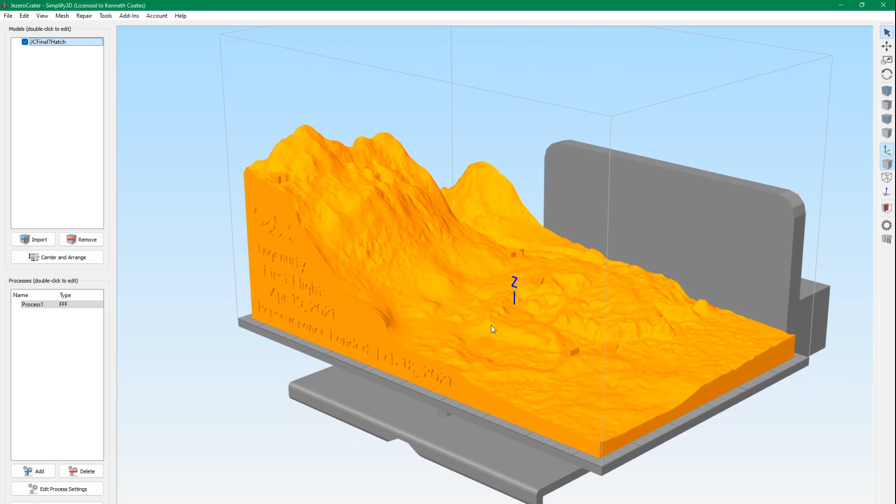This is where they landed. So I have these different terrains. This is the terrain of the crater where it landed. I've got different markers on here. This is where it landed. This is where it did some science, and it's going to go driving up this canyon and maybe up to the top of the rim of the crater.

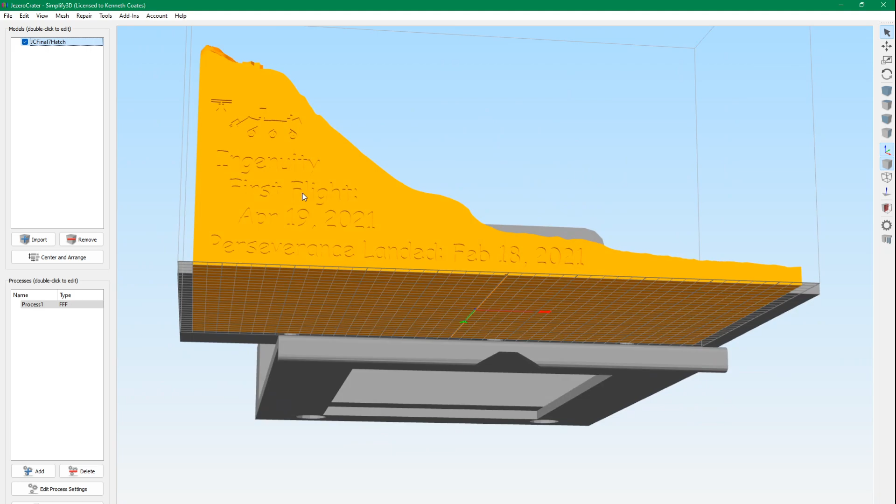Along the edges, I have the key on the back and some information about when they landed and when the first flight took place. On this side, I've got

the two organizations responsible for the rover, JPL and NASA, and the name of the crater, Jezero crater, and then a 1 kilometer scale. So this is a nice outreach item that I use for public outreach from my astronomy club.

Anyway, I tried slicing this on the Simplify3D version 4. You'll see that it has some problems.

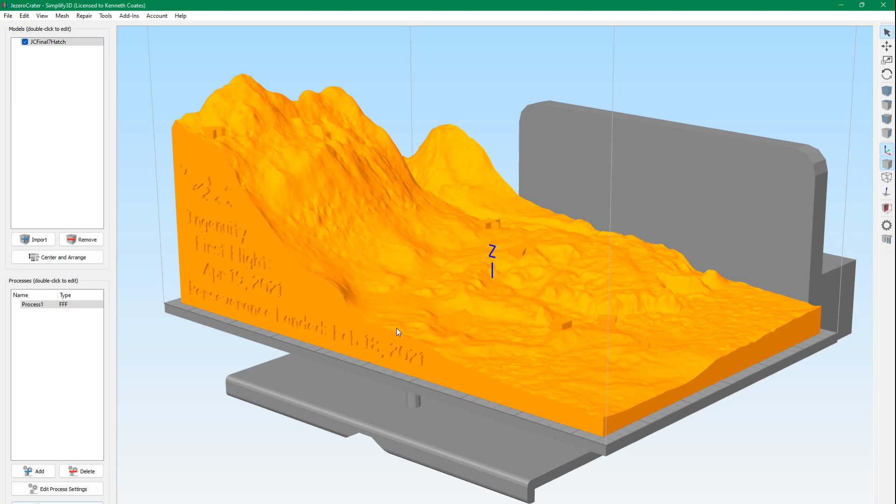Again, this model is very complicated. I started out with a 3D model published by NASA, and then I added these markers. So if you look how it sliced this, for these markers, like the square marker, it didn't put any support in that whole area there.

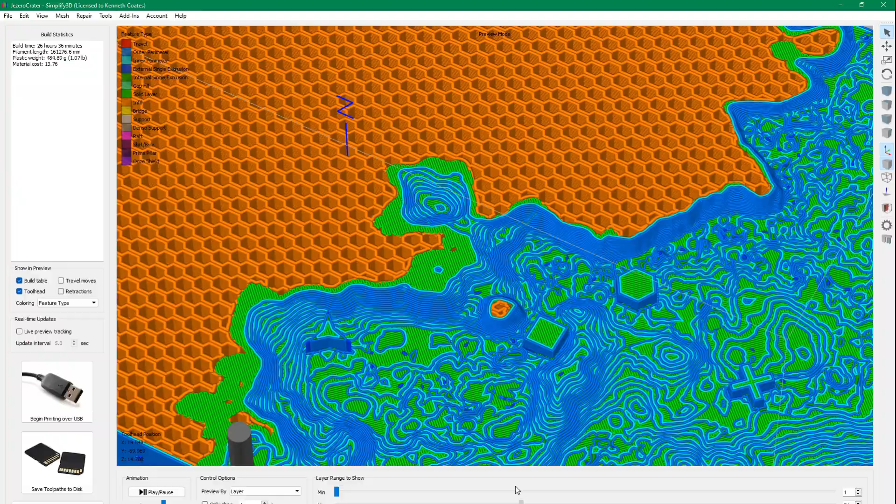It turned out that I didn't actually print this because it looked like it was going to be a problem. So I didn't print this one.

Instead, I used FlashForge, FlashPrint rather. This is the free software that comes with a FlashForge printer. And for this one, let's look at the parameters I use.

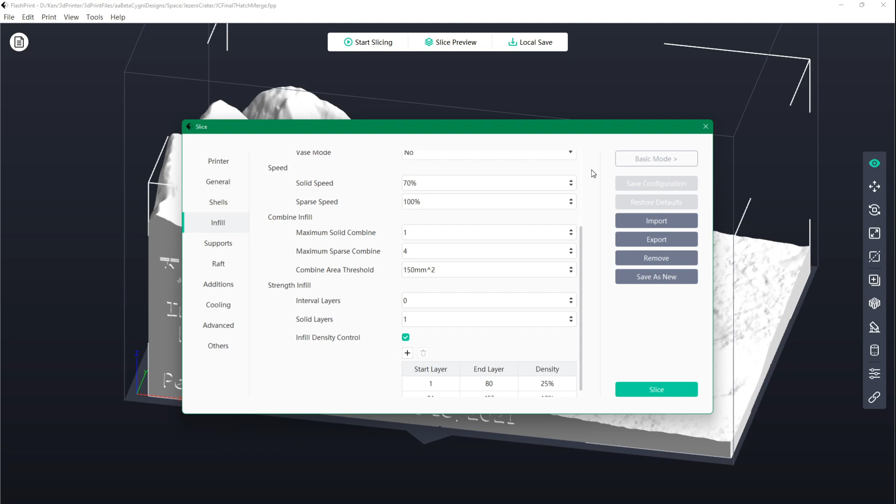So the lower area I was worried about being stiff, so I increased, and also I was worried about the flat areas not having enough support.

So for the first 80 layers I had 25% infill density, and after that I went down to 10%.

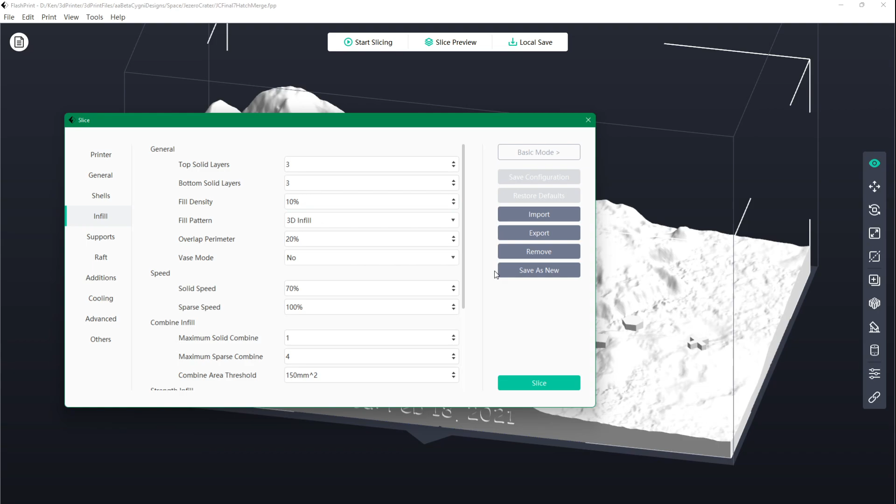And I'm using a 3D infill, which is a gyroid. So if we do the slice preview, you can see. So there's the gyroid.

So it's 25% down here, and you can see it's laying down the flat areas. And then as it gets higher up here, it's only 10% because it's steeper, so it doesn't need as much support as what I figured.

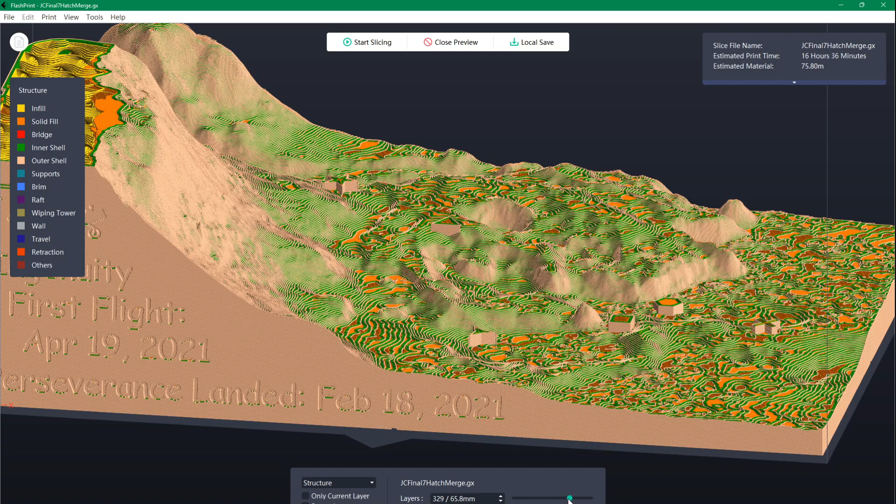So this prints in a little over 16 hours, and it prints okay.

But I thought this would be a good opportunity to see if one of the new features of Simplify3D version 5 would help with slicing this model.

So I dropped it in here. This is on the G2 now, my Guider 2, so it's got a bigger print area. And for this one,

I picked gyroid because that seemed to work well for the other one. But the feature I'm talking about here is the dense internal infill.

So when you get close to putting the surface layers on, you can increase the infill density to give it some more support, so it'll be stiffer.

So this defaults to 0. So if you have this as 0, then it won't do this.

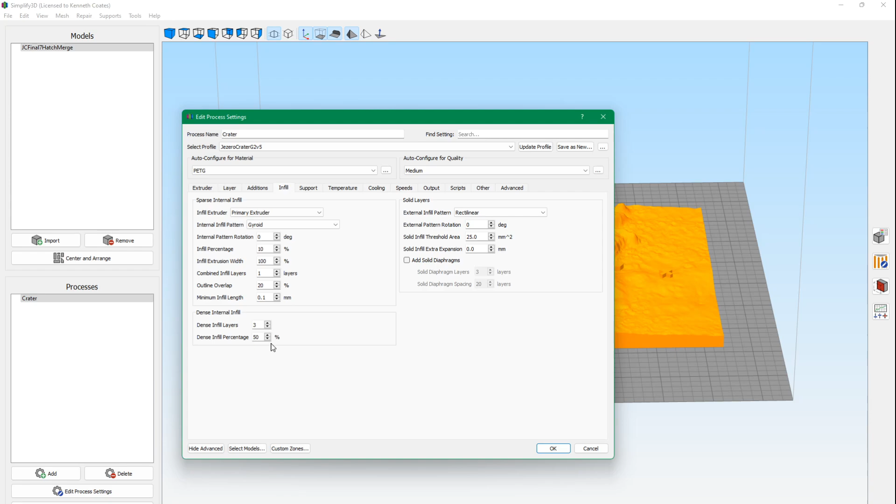So again, I'm trying to print the whole thing at 10% infill, but with this, I'm hoping that these flat areas will have enough support so that they'll print properly. So we'll see. It'll be a little bit of a challenge to print this, I think, using these parameters.

But if it does, then it's going to take a lot less time and use less material. Because the FlashForge, well, this version of FlashForge only gives you the

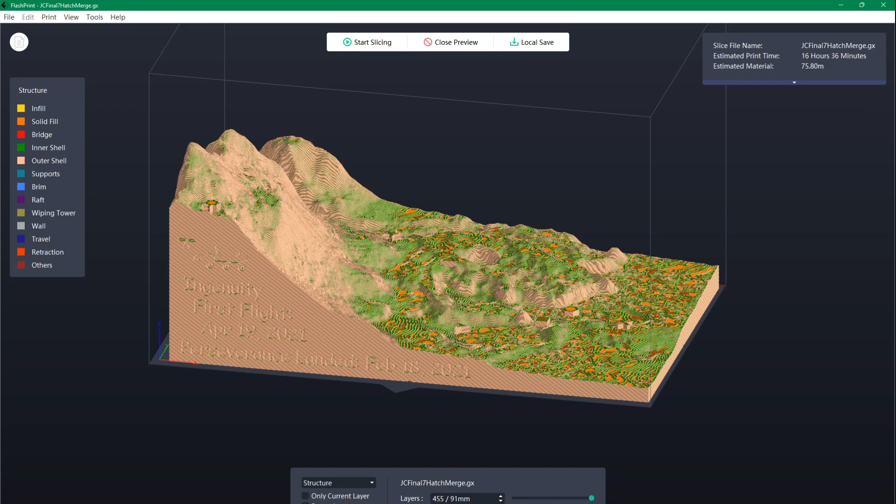length of material. I think the newer version, which I actually had some problems with, so I'm still using a 5.2, will tell you how many grams you're using. But according to my calculations, it was using about 220 grams of filament.

So for this one, with 10% all the way through, it's only going to use about 187 grams. So for one reel, a 1 kilogram reel, I can get 5 of these prints with this print, and with the

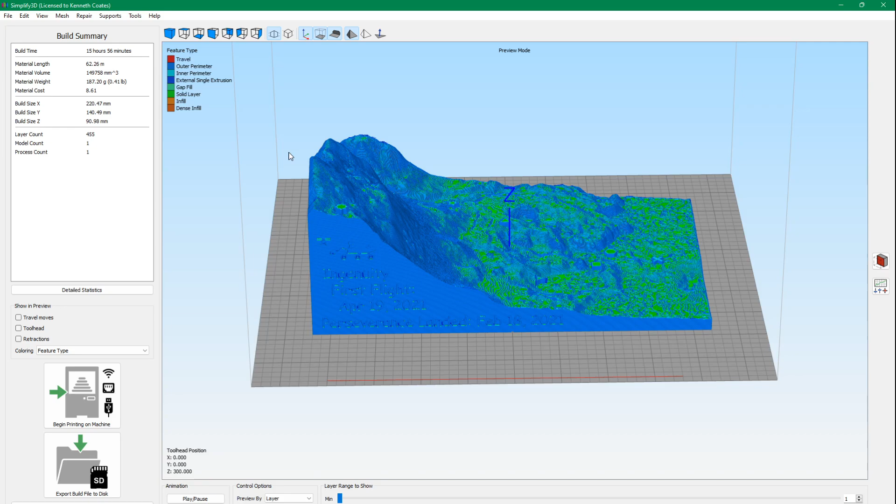FlashForge version, I only get 4 prints. So let's look at how this sliced it.

So we can look for those problems before. So here's that square before, but you can see it's putting support material in that square area. So it sliced that properly now.

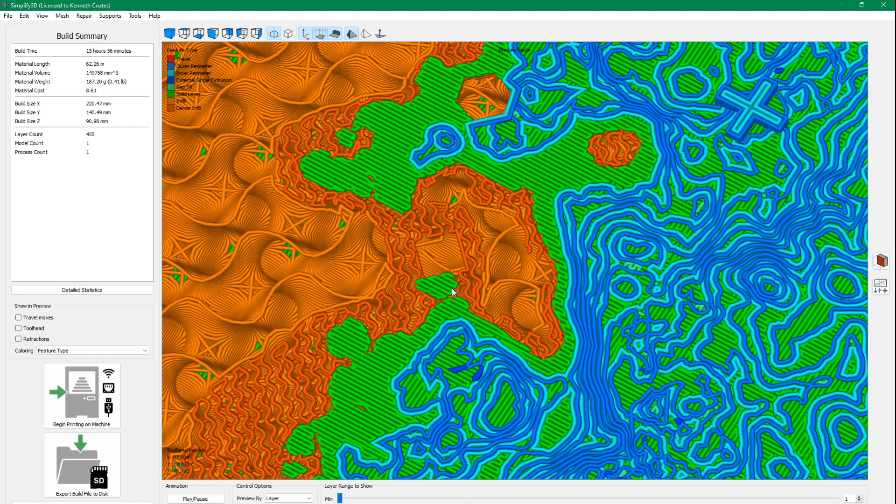And these red squigglies here, these are the higher density filament or infill that's putting in when it gets close to putting in the three surface layers.

So the question is, if we look at some of these, it goes over here. You can see here, it's just printing off, not supported. So it's doing the high density, but it's printing it not supported. So whether that, it's like bridging, right?

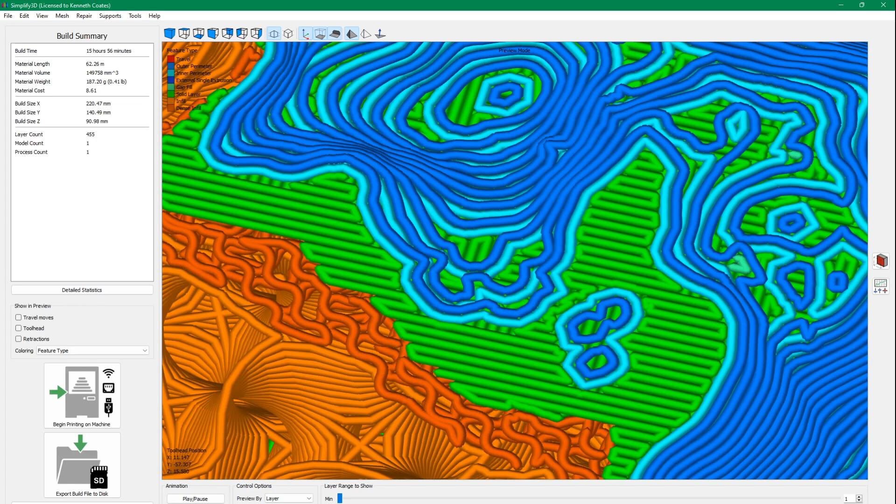So I'm hoping it's squiggly enough that it'll adhere to each other and will make a surface that will make a nice clean surface and support this.

I'll have to see. This could fail. I have to give it a try.

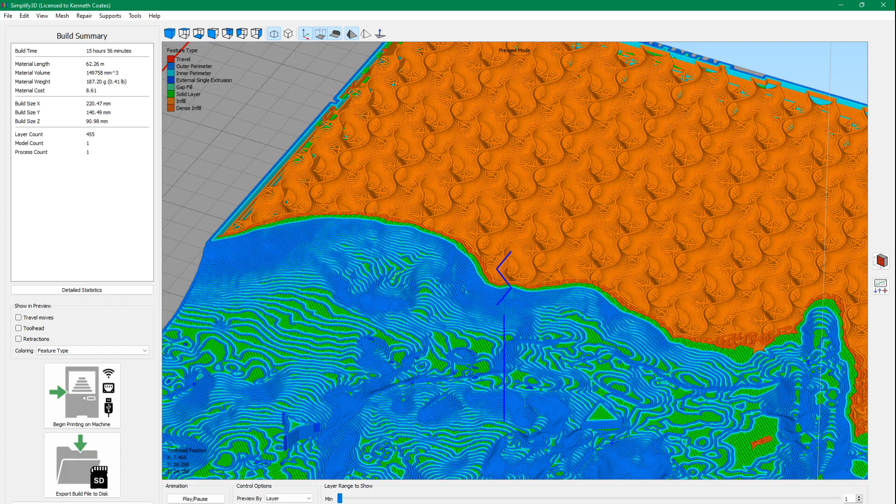And again, when we get to the higher elevations, there's no problem because it's only just doing a little edge here. So because the model gets much steeper up here, you don't really need that much support because the layers are printing on top of each other.

Anyway, so this is only taking 15 hours. So actually about the same amount of time, but less filament.

I think I'm going to go for the whole deal here. I'm going to try doing combined infill to speed it up. Because it's doing combined infill, it's only printing every second layer of infill, so I'm going to change this to 4.

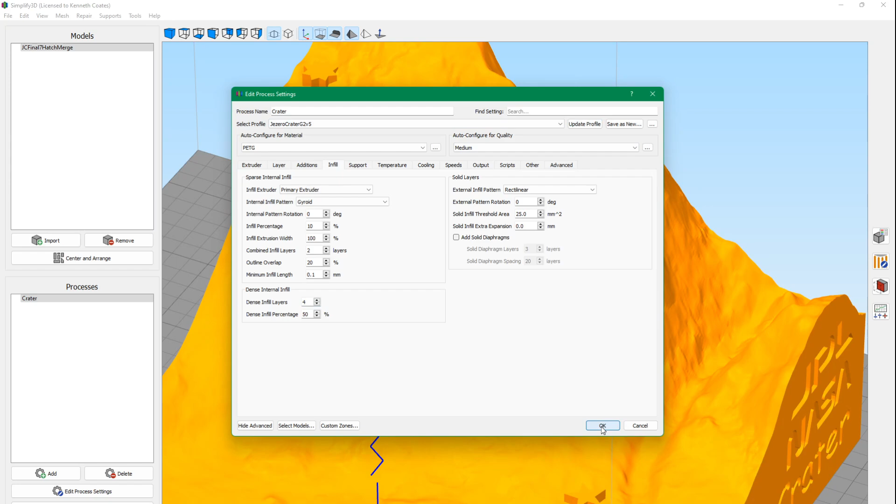Let's try that. That'll make a dramatic difference in the amount of time it takes to print. It's a little under 13 hours now, so that saves about 3 hours.

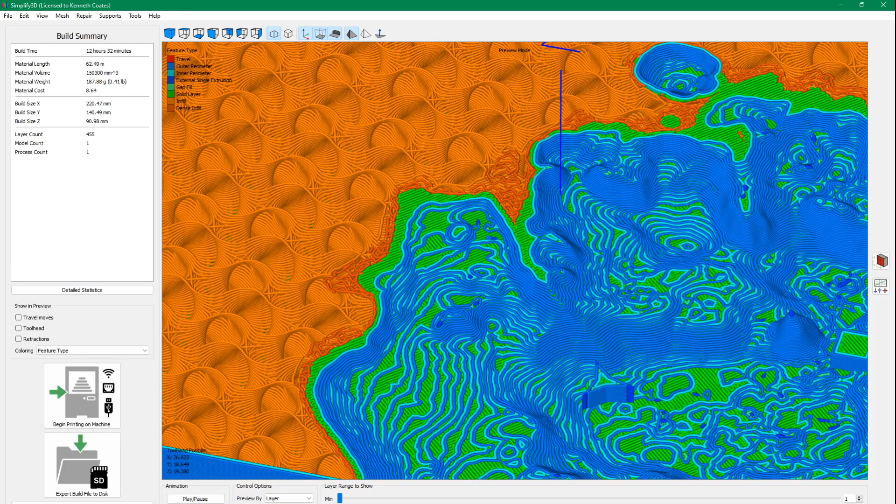So I'm going to try this. It could fail. If it does, I'm out a couple hundred grams of filament. But if it works, that'll really be a big help, getting an extra print out of each reel and speeding things up considerably.

A 16-hour print is kind of, the longer the print, the more risky it is, because you could get a power failure or something else could go wrong. All right, so we'll try this out and we'll see how we do.

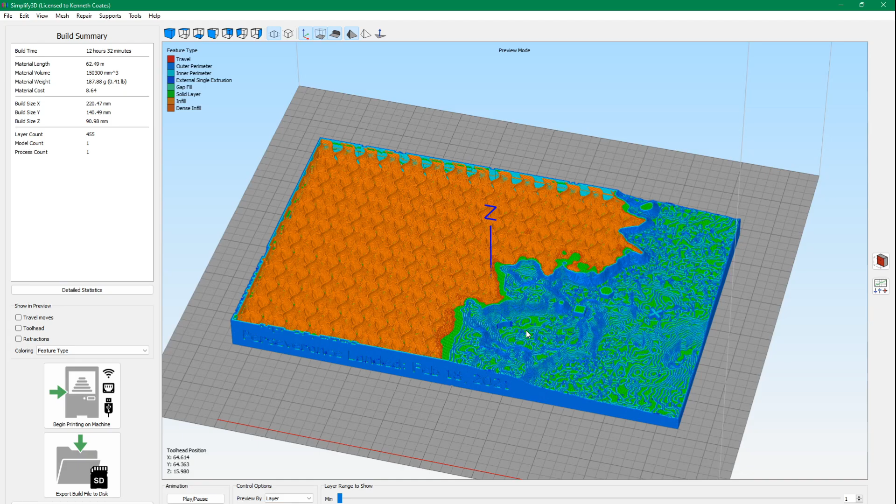Okay, so we're ready to test our print of the Jezero Crater 3D model. And this is our first real test. We loaded our filament, we're ready to start printing.

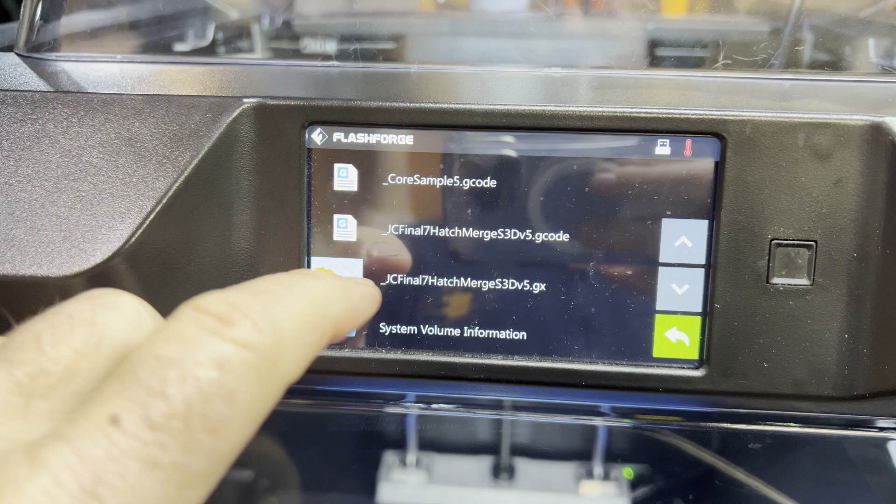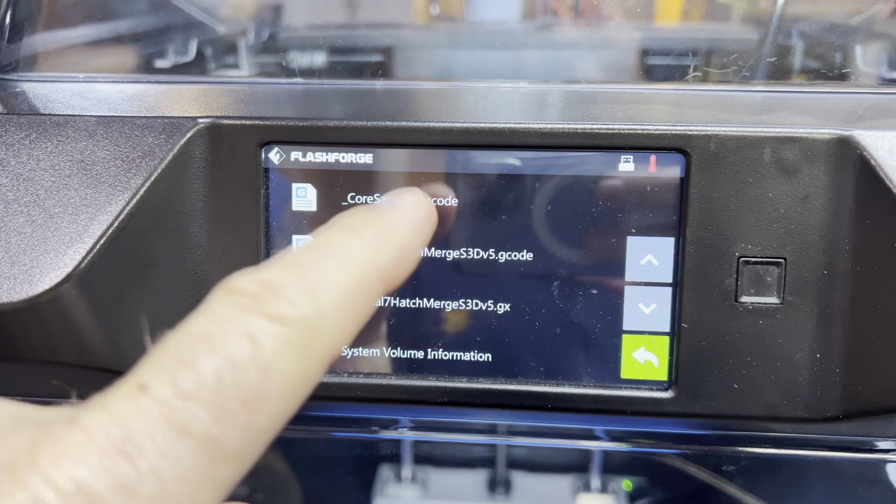So Simplify3D produces 2 files for the slicing: a regular G-code file, which is what we've been getting from version 4, and also a GX file, which is specific to the FlashForge and includes a thumbnail.

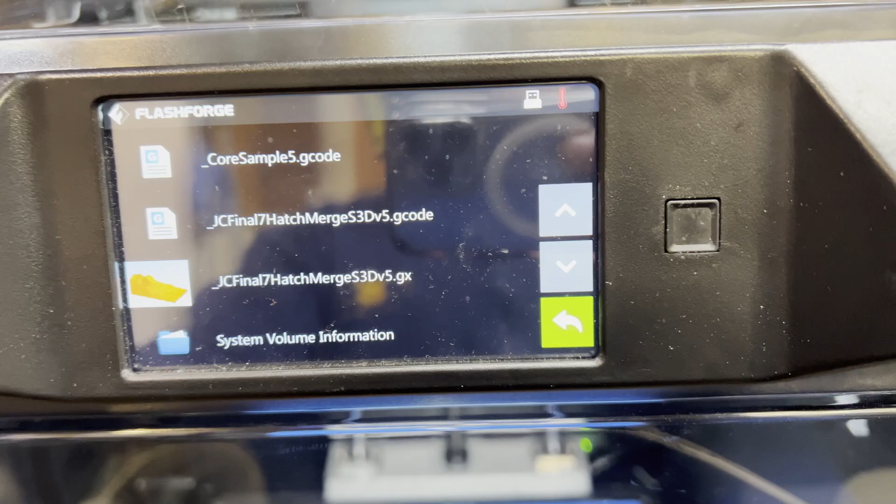So there's our model. It's cold here in the garage this morning, it's 54 degrees, and pretty high humidity because it's been raining. So I'm printing with the top on, even though they say don't print with the top on with PLA. I always do unless it's over 70. So anyway, we're going to start this.

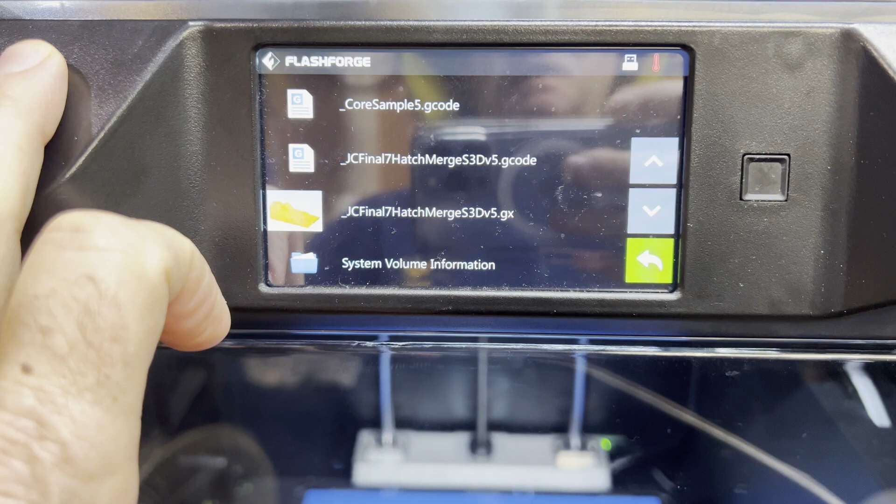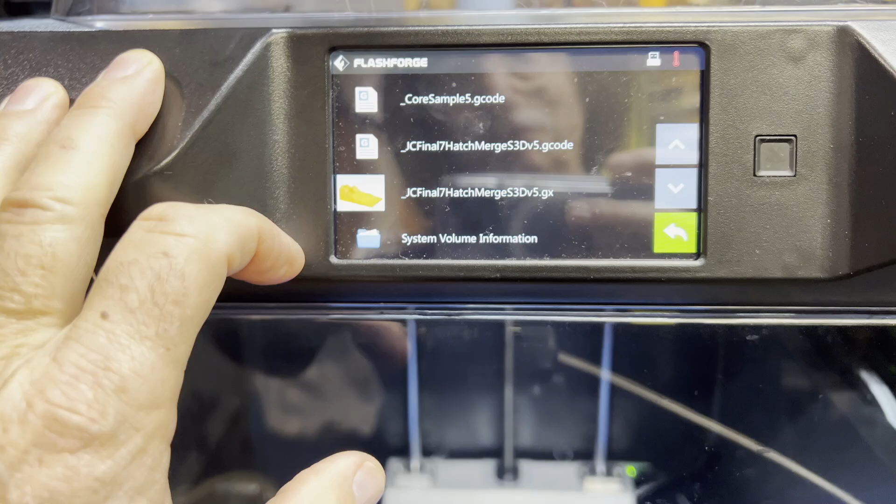Simplify3D predicted 12 hours and 32 minutes. Now, if it was FlashPrint, I would believe that number, and it would be very close to that. But FlashForge version 4, or Simplify3D version 4, was usually about 10% under the actual time.

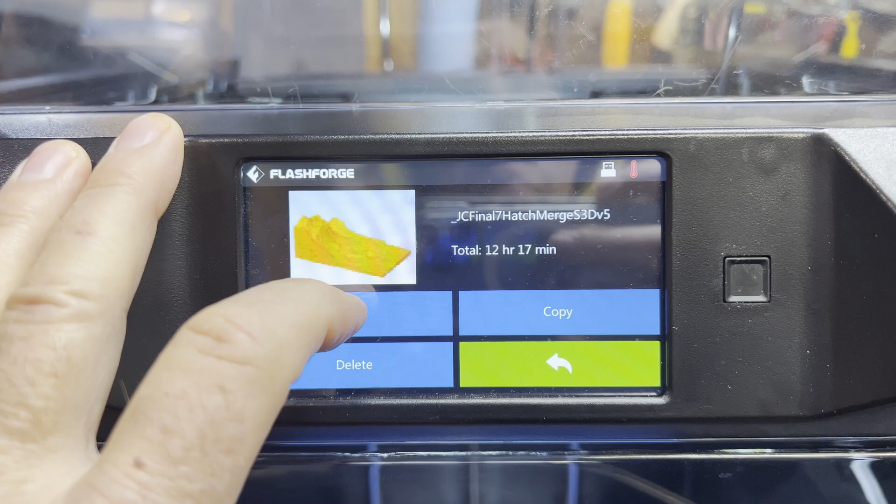But we're going to go ahead and try. We're going to use the S3D version, and it says 12 hours and 17 minutes. So we're going to set our timer for 12:17 and then come back and check on it.

Now I do have the time-lapse camera set up, so usually I do 10-second intervals, but since this is a 12-hour print, I'm going to do 30-second intervals. Then I can compress it down later and make it into a quick time lapse.

All right, so starting up. I usually don't start the time lapse until it gets up close to the top, so I'm going to start that up. We'll start the timer, and then we'll come back periodically during the print and see how it's doing.

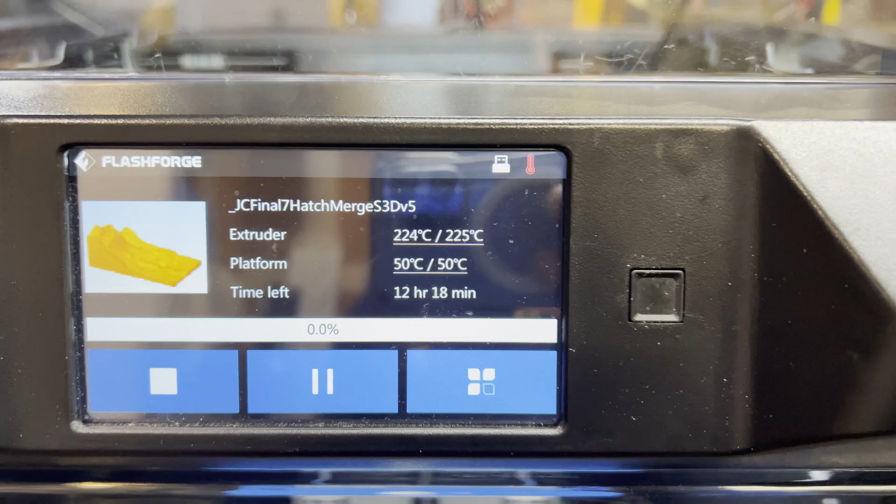Mostly interested in seeing what happens - now it says 12 hours and 18 minutes, so it's already changing its prediction. Most we're interested in seeing how the 10% infill and the dense infill on top of that works on the flat areas of the model.

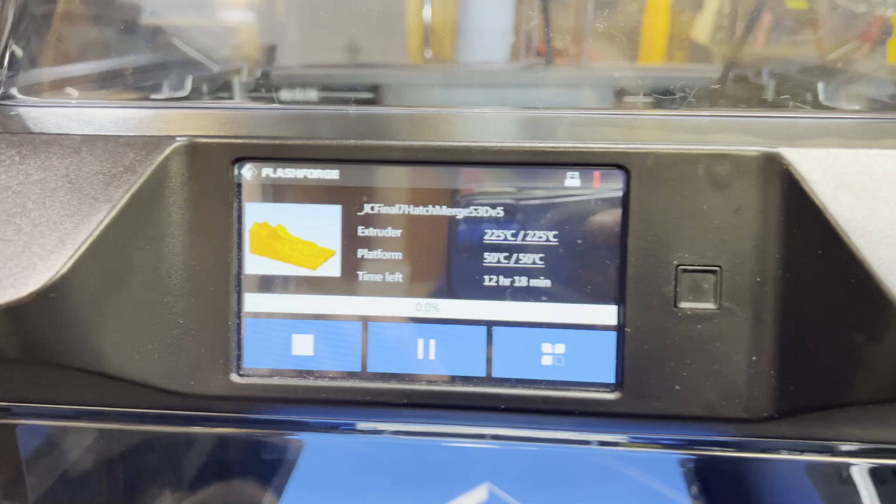See, this area down here, it's pretty flat. The steep areas, I'm not worried about the infill, it's fine. And if you remember from before, with the FlashPrint slicing, all right, starting up here.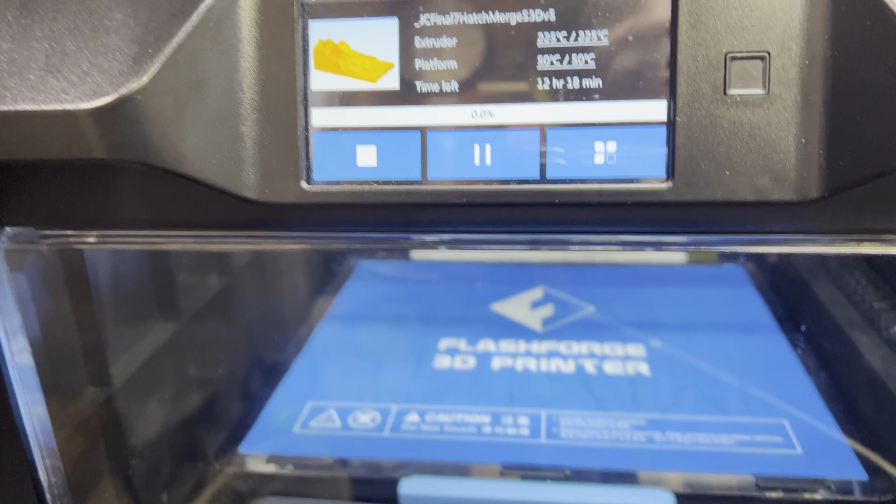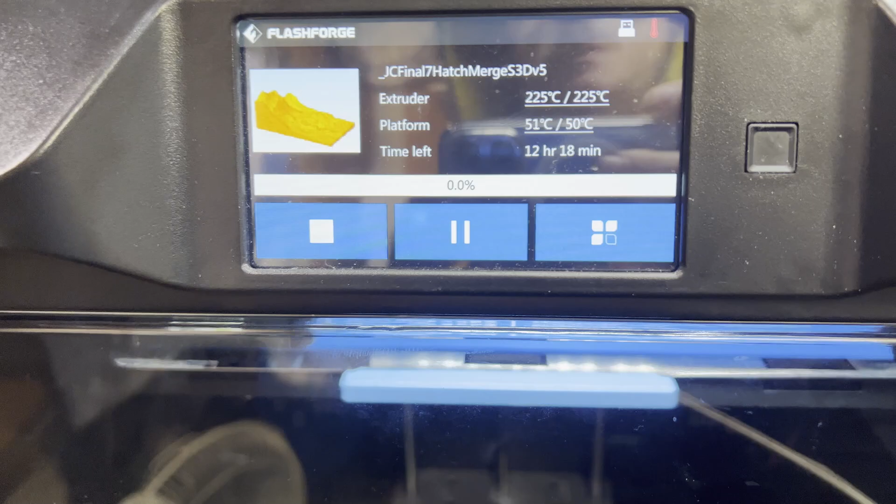With the FlashPrint slicing, I used 20% infill down below and then changed to 10% up above. So that took 16 hours to print and used more material. So I have high hopes for this one.

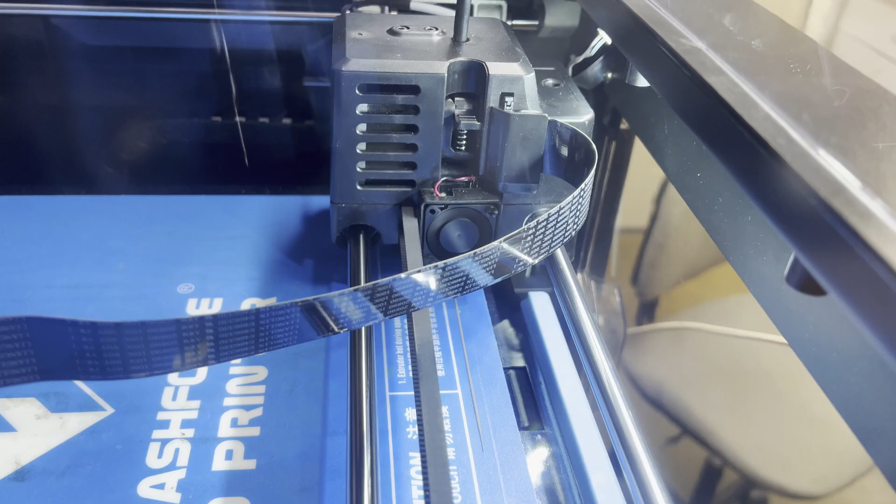Let's see if we got started okay. Yeah, our first move is okay, so it looks like we're off to the races. All right, we'll come back in a couple hours and maybe it'll be up to this flat area where it's doing the dense infill. That'll be interesting to see.

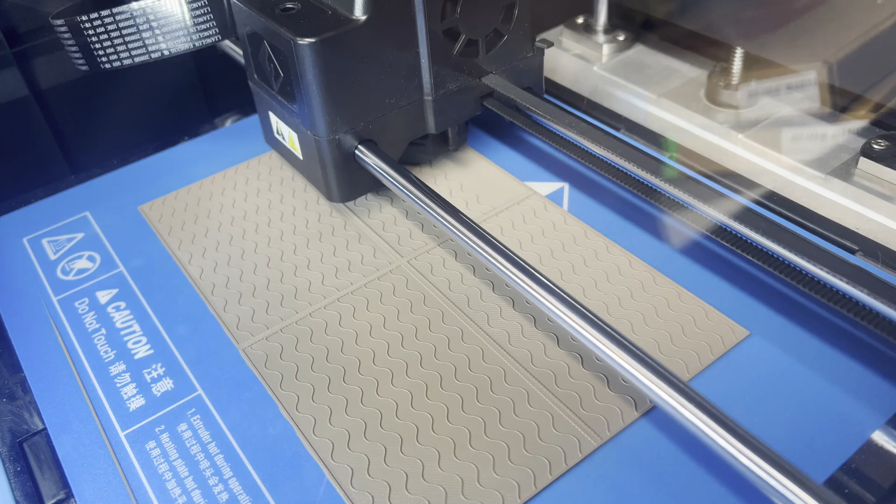All right, this printer got off to a good start, and you can see it's laying down the first layer of gyroid infill. This is 10% gyroid.

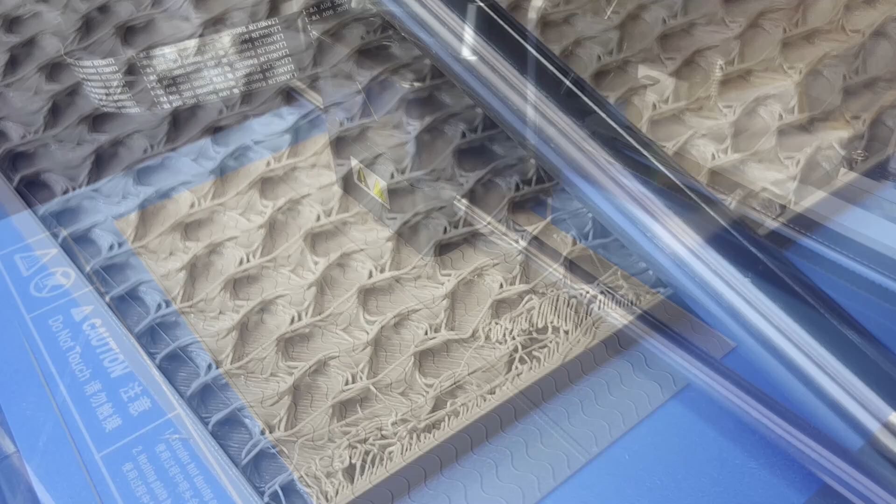All right, you can see it started to put in the denser infill. I just went over it, so I think it's working, even though some of it's printed out in the air, because we're printing 2 layers of infill at once, so it's going to be a thicker bead of filament.

And it's going to be cooled, and I think I'm doing 2 thick layers, and I think it's going to work. So we're going to see, once it starts laying down the surface on top of it, we'll see if it actually is working.

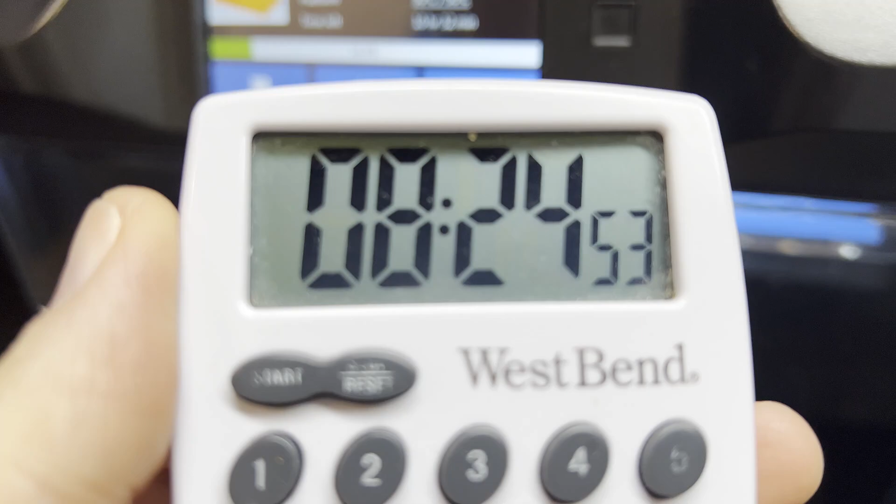All right, I set my timer at 12:18 to start with, and now we're at 8:24, so almost 4 hours of printing. But this guy is still saying 10:31, so it looks like it's recalculating as it goes.

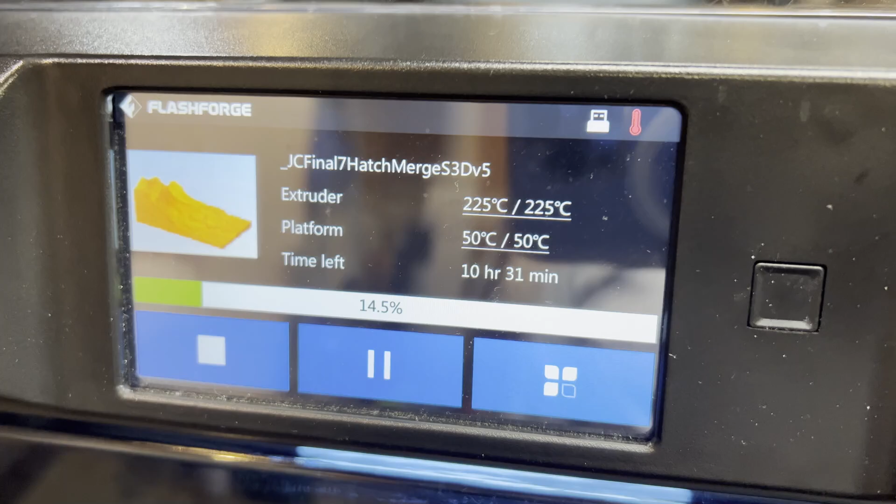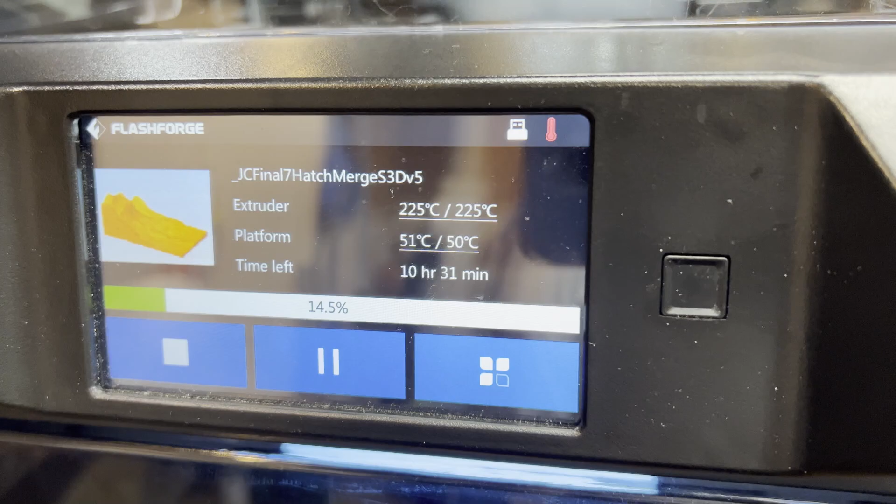I did do one FlashPrint print earlier, and it was pretty accurate, but then at the end it kept adding minutes because it wasn't quite going to finish in time. Anyway, it's not going to take 12 hours, but we have enough time, so it doesn't matter.

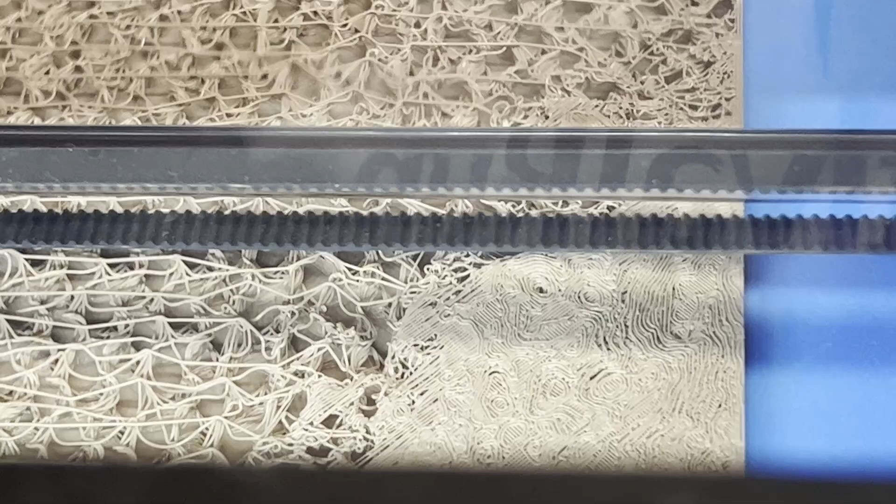Let's take a look at how it's doing, and you can see that it's doing pretty well. All right, here's that same area with the FlashPrint version, and you can see it has little holes and voids just like this one.

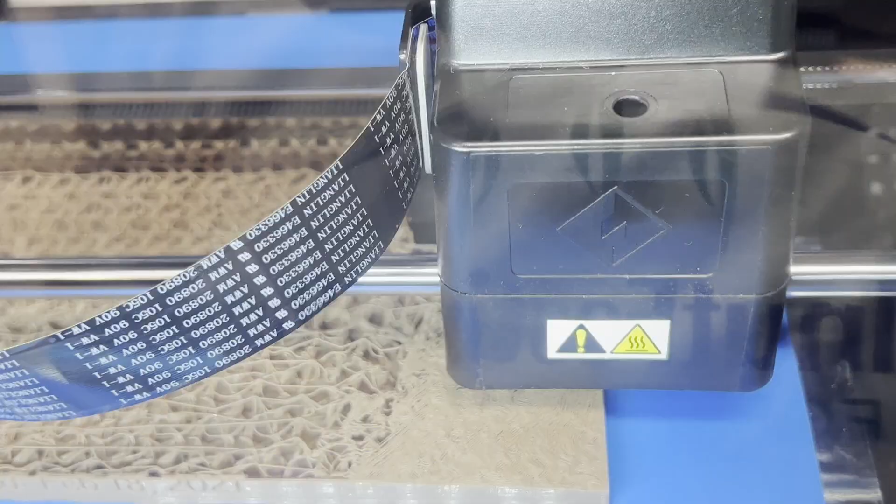So I think the quality is actually similar. If it is, that's a big win because it's going to take a lot less material. We can get 5 prints per reel instead of 4, and it should be faster.

This one took 16 hours. I'm expecting this one to not take that long. So we'll know eventually when it's all done.

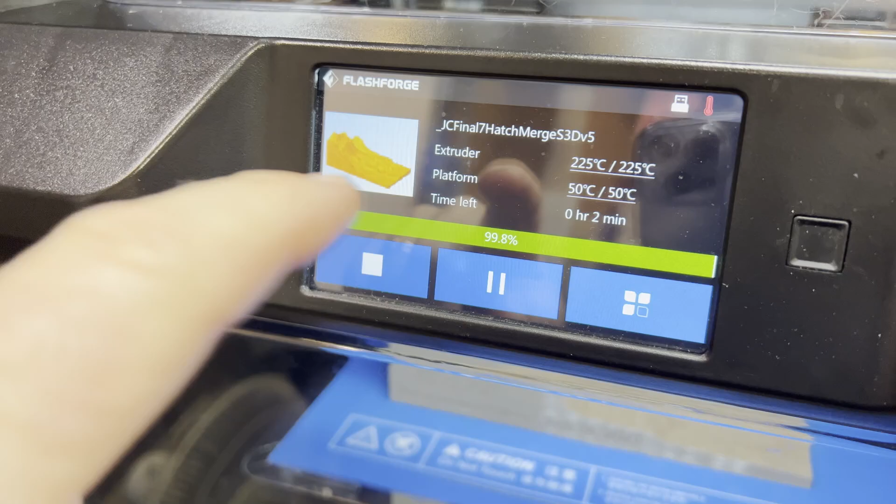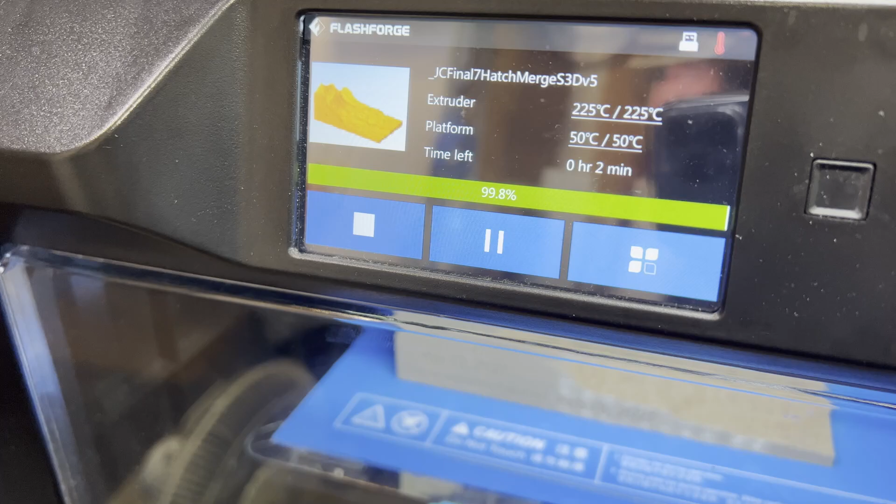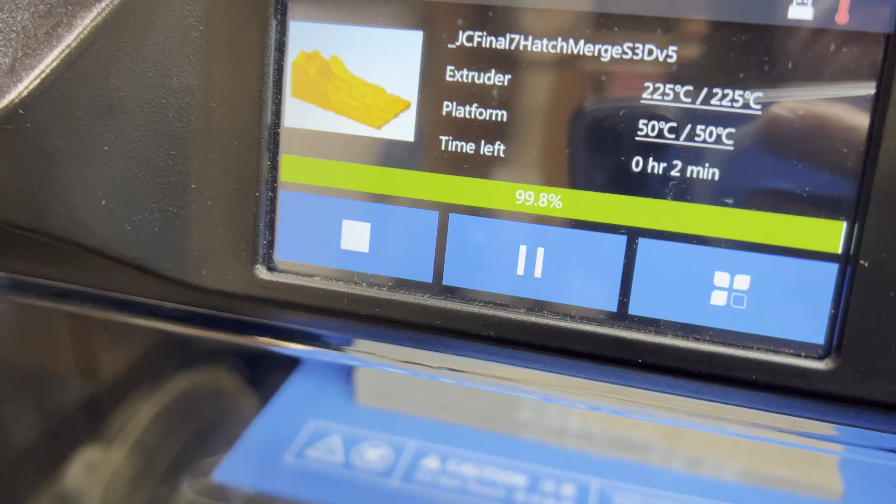All right, so it's at 99.8%, and it seems like with the GX files, it continually refines the time remaining, which is actually pretty handy the first time you're printing something. Even though it wasn't accurate in its overall prediction, because we're upwards of 13 plus hours, I don't remember exactly when it started, but when it's all done, it'll tell us the total time. As it's printing, it's continually upgrading this time left. So I like that. I'll be using .gx files whenever I can.

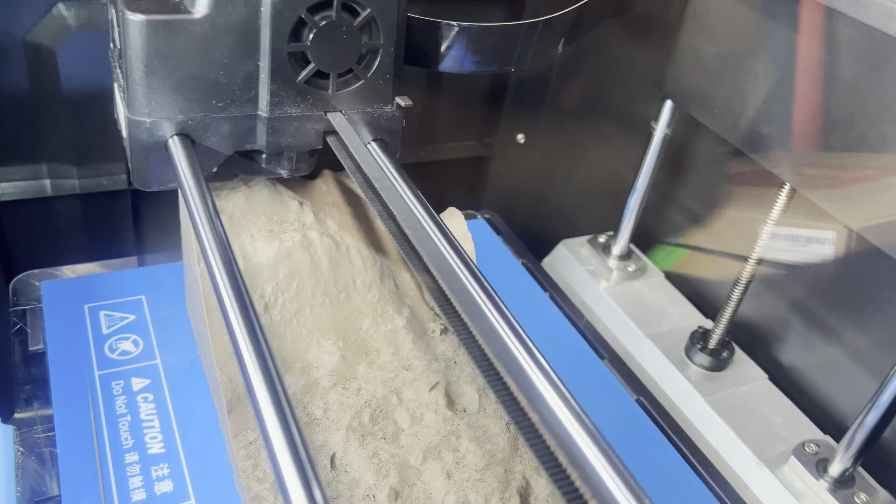If we look at the print, we'll take it out in a minute. It's almost done, but it looks great to me. So we'll do a side-by-side comparison with the one I printed with FlashPrint as soon as it's done. And again, we're going to check the weight and see how well it did compared to what it predicted.

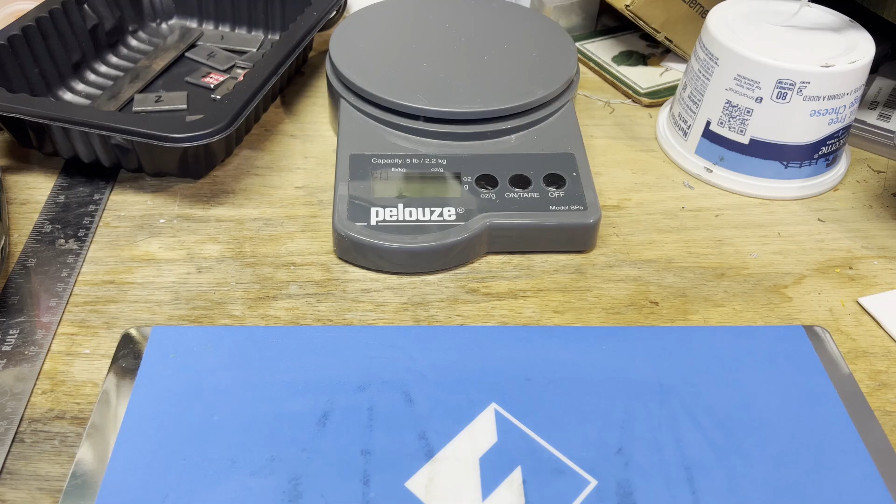It's done. So 13:49 versus 12:17. So it took about an hour and a half longer.

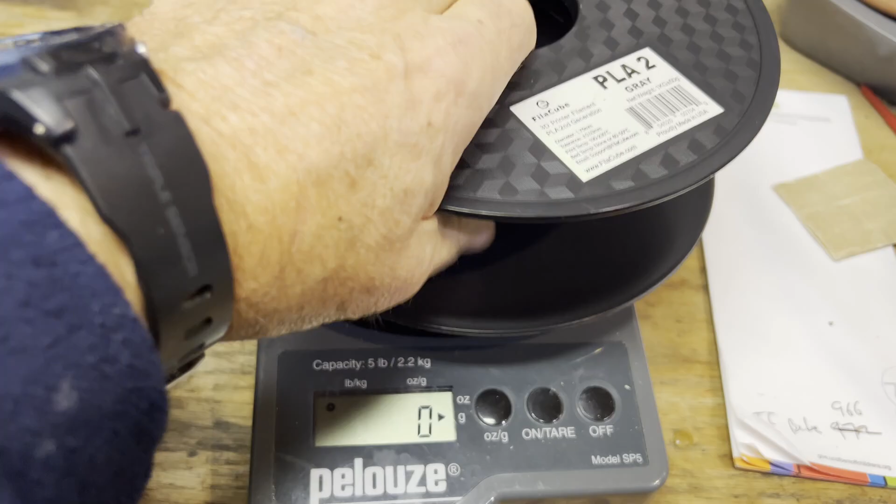All right, so I tared the scale. I took this out of the machine. And 817 is how much is left.

Right, so here's our print. You're on this flexible surface, so it's going to be a lot easier to get off. It might just come off without any persuasion. Now we're going to get a little bit of persuasion.

Okay, the short way, the spatula can reach all the way across. There, all right, so the bottom came out nice.

I remember I told you to put these score lines in. It's not as big of a deal on this one, but I think it still helps release the model from the surface. It takes a little bit longer to print because you've got to print these little overlaps, but it's no big deal.

All right, so here's our 2 models. We're going to weigh them. This one should have more filament in it because it had a higher percentage at the bottom, so let's try that.

Okay, so this is the FlashPrint version, 219 grams. And this one is 147, so just a little bit less than our 150. You can tell this is lighter.